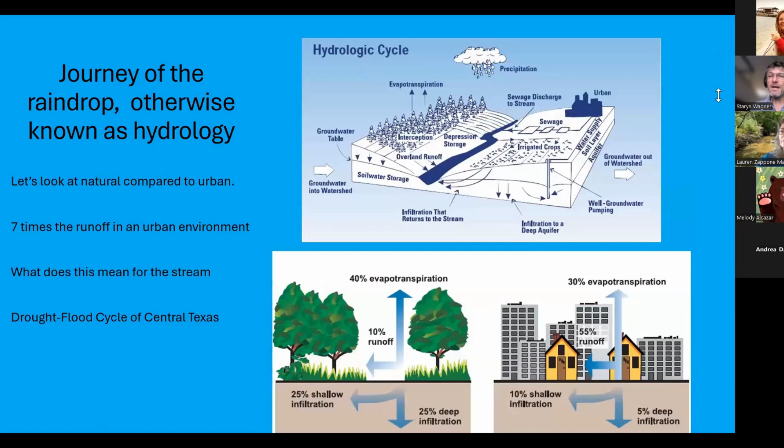As it would come down from the sky in a natural environment, and then hit trees and the leaves on the trees, which would slow down that raindrop. And then with less impact, it would hit the bushes underneath and the grasses underneath and slowly drip down and follow the root channels and the interstitial spaces in the soil and make its way down into the ground where some of it would evaporate back up into the atmosphere. There'd be plant uptake.

The water would also travel through the soil, finding its pathway to the streams. That's where our streams come from and why streams flow when it's not raining. But then we have a situation where we start building things out. And in this scenario here, I only show two examples: one of the fully native natural forest and a heavily urbanized area, right?

And you can see that there's some stuff here. You can see that we got a drastic change in the water balance, right? There was 40% evaporation before, 30% now. But the big difference is, if you look at what's going on the ground, there used to be 50% of the water going into the soil, both to deep infiltration and to the shallow infiltration. But in this urbanized setting, it's now down to 15.

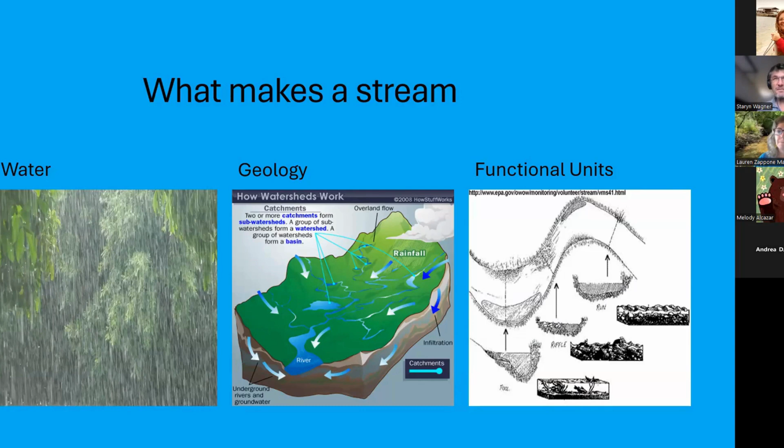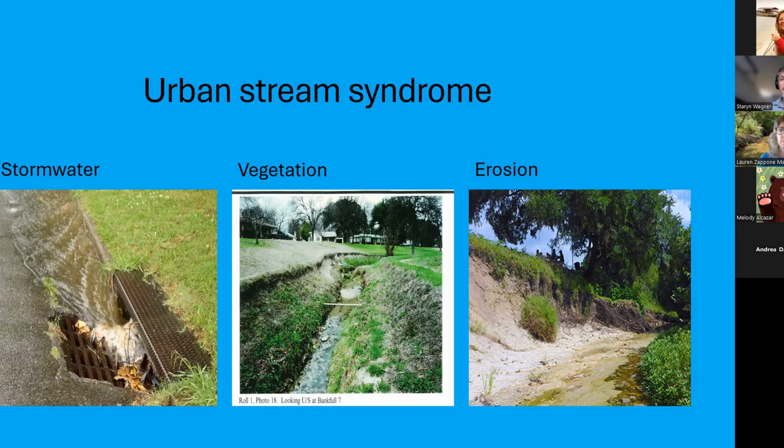But as we divert all this increased runoff in these suburban and urban environments to the stream, we get what's known as the urban stream syndrome. Our stormwater is going into these pipes, and these pipes are shooting it out like water cannons at our creeks. And our creeks are down cutting. So instead of a nice shallow scallop, which is the profile of the stream, we have these steep, deep channels that are down cut, usually to bedrock in this area. That's created a lot of erosion and causes a lot of other problems.

Our common system is the gray stormwater system. You can see that raindrop lands on the rooftop, runs down the roof into a gutter, goes down the downspout, which usually gets diverted to the driveway. It goes down the driveway into the street, down the street gutter into the storm inlet. Then all of these different sources collect in these storm sewers, and that outlet just blasts it out to the creek. That's been very effective at getting rid of our stormwater, and that was the focus.

But what we've realized is we're starting to really starve our soils of groundwater, and we've caused all these problems within our creeks. That raindrop originally could have taken days, weeks, months, years to travel from the sky to the creek. Now, with this gray stormwater system, that raindrop and all its buddies are delivered to the creek within an hour. So it is this massive inundation of water, and it causes a lot of flooding as well as erosion, and blasts out our aquatic habitat.

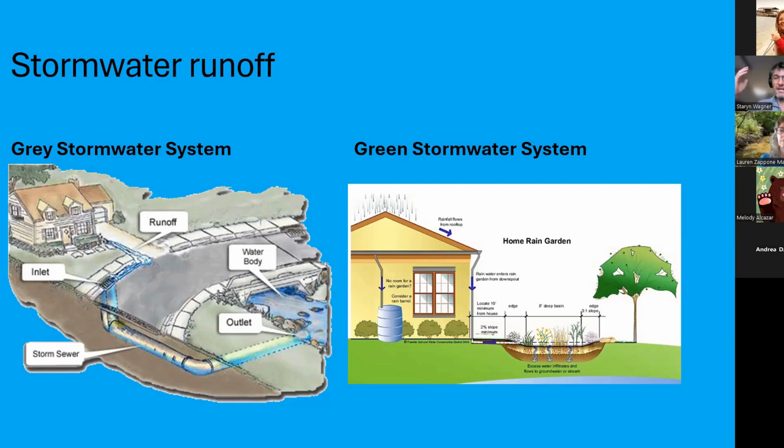So the green stormwater idea is to change that hydrologic process so that we intercept that raindrop once again, and this time try and slow it down on its journey to the creek and get it back to infiltration into the soil. So, what are some of the benefits? Why would we want to do this? Well, for one, whether it's running off your house, a street or parking lot, or even surface flow over your front yard or a park, there'll be a lot of pollutant treatment.

If we can get that water to stop and sink into the soil, then the biota within the soil has the opportunity to break down pollutants and control contaminants, and sometimes just hold the contaminants. Some things take so long to break down that we won't see that anytime soon, but we're keeping it out of our waterways. Also, with infiltration into the soil, we have the benefits of groundwater recharge, more water going to the streams during drier times, and keeping our plants alive, our grasses, our trees, our shrubs.

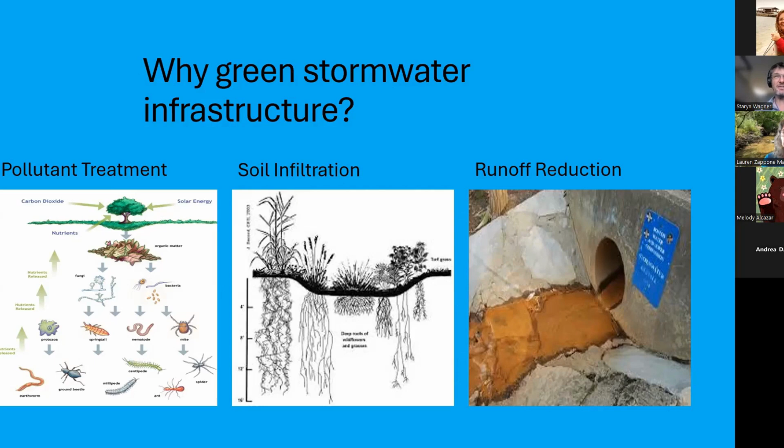And in this interception and infiltration, we get a runoff reduction. So that water cannon that I keep talking about blasting into the stream, there will still be some going to that, but we've reduced it.

And so the two types of green stormwater infrastructure methods that I'm going to talk about, one is the rain garden. We've talked about some of the function of it, right? There's several types. There's a variety of components to a rain garden. There's different vegetation, maintenance, design. So these are all some things that I'm going to cover.

Functions of the rain garden is capture and divert runoff, right? So normally, like I said, all of this water is most frequently diverted to the street. Our streets are made to collect rainwater. They have a high point in the center, and the outer edges by the curb are down low. So that's why it's called curb and gutter. Those are sort of the gutters of the street. The center is high so that even when there's a lot of water in the street, the emergency vehicles still have sort of a shallower or drier part in the center that they can move on.

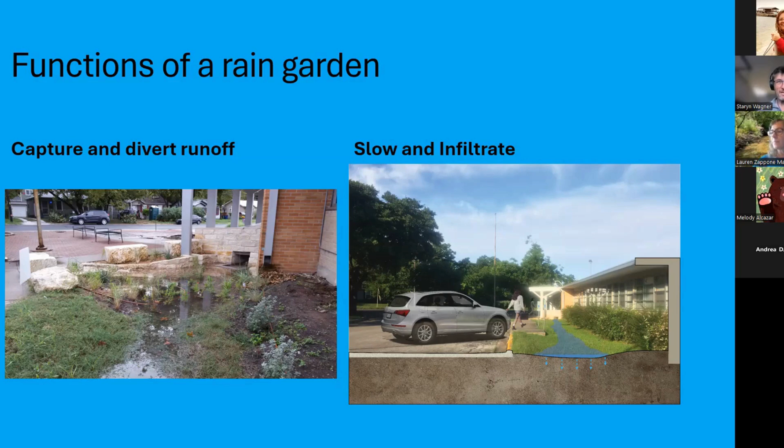And the other function is to slow this water down and infiltrate it. So if we can get water flowing through a vegetated area, even if that rain garden is full, the vegetation is going to slow down the movement of water. So we're at least giving it a little more time to soak into the ground, and we're not rushing it to the stream or to the storm drains as quickly.

So there's a couple types of rain gardens. And we could probably go into more detail of different types, but two key types that I like to point out are an inline rain garden and an offline rain garden. Now, the inline rain garden has an inlet for water and a separate outlet for water. And so as soon as the rain starts and runoff begins from your drainage area, the pond starts filling up because the water's flowing in from the inlet.

But once that pond fills up, then the water that's flowing in passes through the rain garden and it goes out of the outlet, right? So the pond is full, the water needs to keep going somewhere, and all this water passes straight through the rain garden, out the outlet, and onto whatever pathway we've chosen for it to go afterwards.

Now, an offline rain garden, which is the kind I tend to prefer, has only one inlet, no outlet. And so it's set up such that as the water is flowing off of your drainage area, it flows into the inlet. And then once the rain garden fills up, the water just naturally bypasses the inlet and carries on in the direction that it was going anyway.

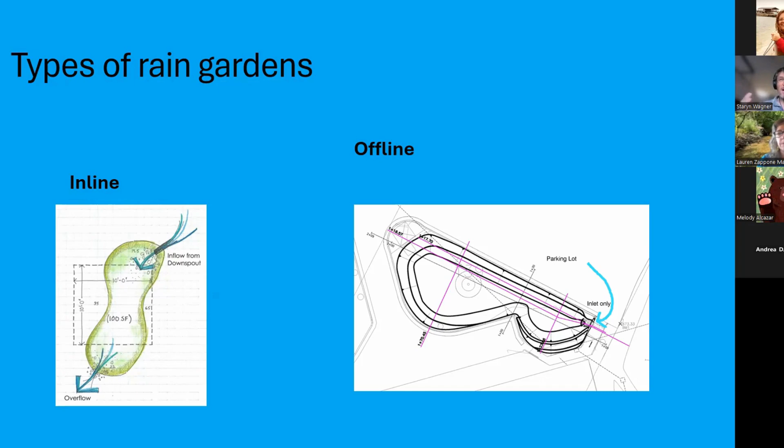With an inline rain garden, depending on how it's set up, but most frequently, the water coming in first fills it up once again with that first highly contaminated amount of water. And then the rest of the clean water kind of passes through, washing out that more polluted stuff. So it doesn't do as good a job at grabbing and holding onto those pollutants because some of them get washed out.

Components of a rain garden, we've kind of talked about this, inlet and outlet. So you have to set up somewhere for the water to come in, and you have to either set that inlet up so that once the rain garden is full, the water bypasses, or you have to set up also an outlet so that when the rain garden is full, the water flows out of it without eroding any of your berms or the outlet itself. So it's important to harden that.

And then berms. Berms are what create the sort of dams of your rain garden. And when you're excavating a rain garden, like digging the hole for it, it's nice to have thought this whole process out so that the soil you're digging up, you're using as your berm. And the berm itself also should be about 4 to 6 inches higher than your outlet. So you don't want it to be at the same level because it's hard to get everything perfectly even.

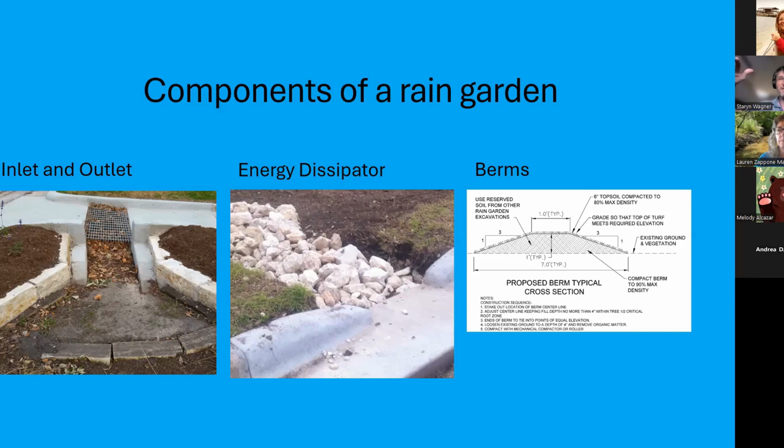And if the water finds its way over a berm, which is usually made of soil, the soil will erode a lot easier than a hardened outlet. So if you make your berms about 4 to 6 inches higher, the water will be flowing out of the outlet before it ever even considers trying to get over a berm.

Staryn, we have a question real quick. Yes. In the chat, it says, is there a cost difference as it relates to the design and maintenance with the inline and offline versions? Yes, I would say there is somewhat of one because you do have to construct a hardened outlet. And when I say hardened, I mean anywhere from like brick, flagstone rock to concrete, right?

So if you just have an offline one, you're only constructing one passage, and that also needs to be hardened for the water to flow in. But if you have the inline, you also then have to build one for the water to flow out of and not erode your rain garden.

Well, speaking of erosion, we have another question. Yes. How do you make sure that you're not undermining infrastructure with rain gardens or depressions? Is there a distance that is needed to be away from sidewalks, roads, or buildings? Yes, and I do mention that a little later, but good question. It's hard to say that there's a definitive distance.

Different buildings have different foundational situations, and it's always something that in the placement of your rain garden, you really need to look at and think about the fact that, okay, I'm going to be putting water into this soil. And so it'll be a lot wetter.

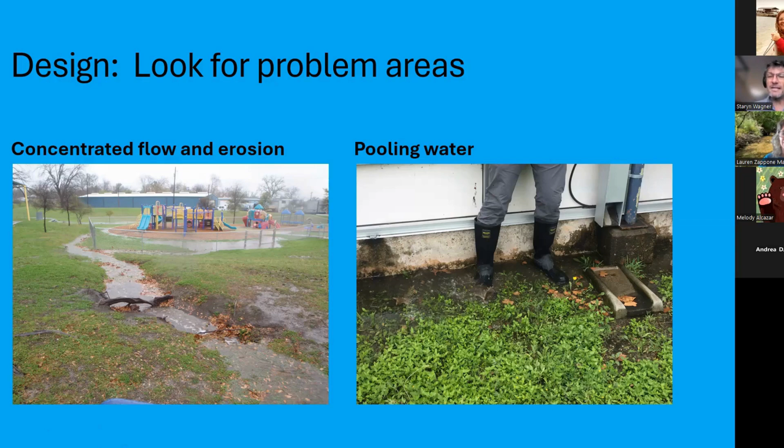Right, so location. In this particular case, we chose Reilly Elementary School because we wanted to get the community to do more green stormwater infrastructure. And Reilly Elementary School has a combined interlocal agreement with Austin Parks and Rec. And so when school's not in session, the school grounds are part of the park, and so the public has access to it. So if I did what I did at this location, they should be able to then go and take a look at it.

And so I had all of this area separated up into small drainage areas. Like I knew where the roof ran off to a gutter, and I had that drawn as a square. And so I was able to think of this whole area as unique drainage areas that I could then start to focus individual stormwater controls, green stormwater controls for each of those, and I would know how to size them.

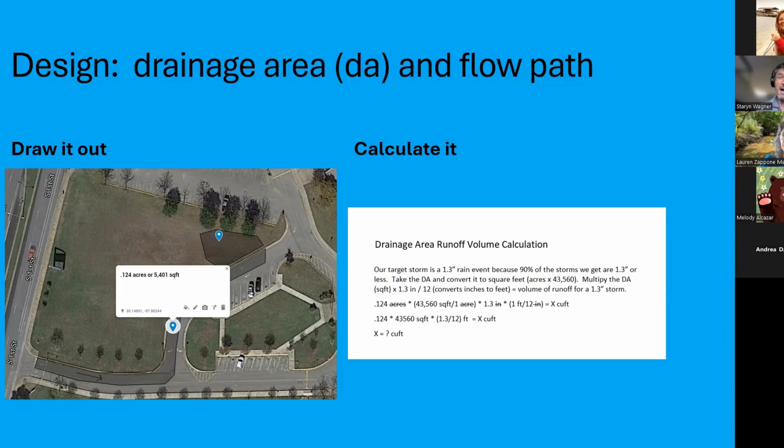And so anyway, you do some calculations, and I included a PDF of this presentation in the chat, so you don't have to try and remember all of this as I'm spewing it out, but you can just reopen that and look at how I did things. But so you can do some calculations to figure out how much is going to run off of your drainage area. And then you're going to use that, in combination with the infiltration rate, to determine how big your rain garden needs to be.

So when you do a rain garden, it's not exactly a one depth fits all. It's not absolutely necessary, but it's important, to help guarantee the success of your rain garden, to understand what infiltration rate that specific soil has.

And a simple way to do that is you just dig a little 12-inch hole, fill it up with water, let it soak in. And if it just soaks in real quick during a really dry time, fill it up a few times until it starts soaking in slower. Once it's slowed down, you fill it up, and every 15 minutes, you mark the time and the depth of the water, right? And then you take the last few of those because you're looking for a constant infiltration rate.

And you just average them out so that you come up with an inches per hour rate, and that is your infiltration rate, right? And then that gets used in our next step, where we know the infiltration rate. So with the drainage area and the infiltration rate, we're going to determine how deep our rain garden can be. And that's essentially, the area of the rain garden times the depth equals the volume.

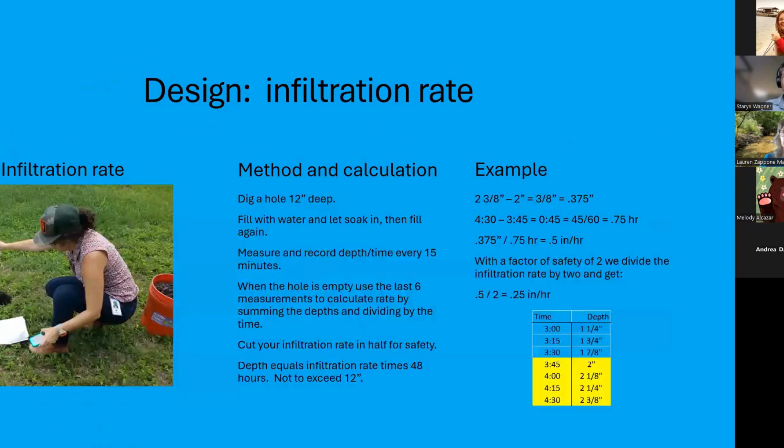So the volume of my drainage area is 585 cubic feet, from the area I had drawn in this previous picture here, which was 5,401 square feet. And I multiplied that times the 1.3 inches of rain, and I converted the inches into feet because I have to do square feet times another foot measurement to get cubic feet. So I do 1.3 divided by 12. That gives me feet of rain. And then multiplied that out.

And then the depth is going to be that rate, which is our 0.25 inches per hour times 48 hours. And we do 48 hours. Oh, that's the other thing, right? You want a little bit of a factor of safety on this. That infiltration hole you dug, it is a horseshoes and hand grenades type thing, right? It's close to it. It's not going to be the exact infiltration rate.

And what we don't want to do is create a rain garden that just ends up being a pond and holds water for more than 48 hours, right? Because then we have the potential of it breeding mosquitoes. So we take our infiltration rate that we calculated and then we cut it in half. So whereas our calculation showed it drained half an inch per hour, let's cut that in half and just say it's 0.25 inches per hour.

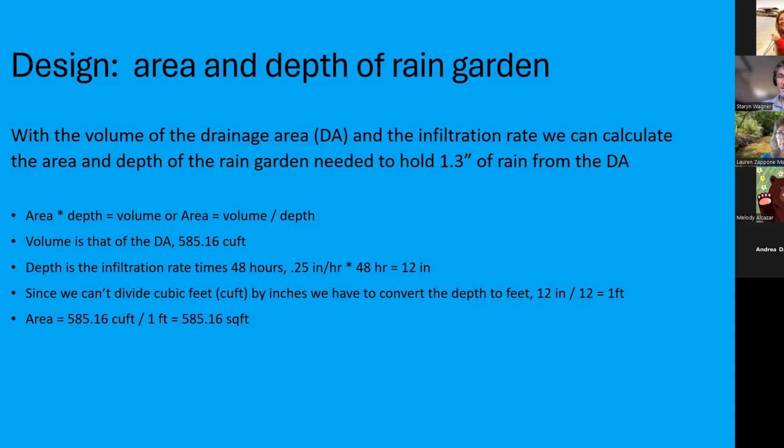Anyway, that's how you figure out depth of your rain garden, is your infiltration rate times 48 hours. And never do you want to go deeper than 12 inches, or at least that's the city's policy. We don't go deeper than 12 inches for safety reasons, and that's just sort of a safety element we've built into all our rain gardens so that we don't get ourselves into a bigger problem, especially when we start to have rain gardens all over the place.

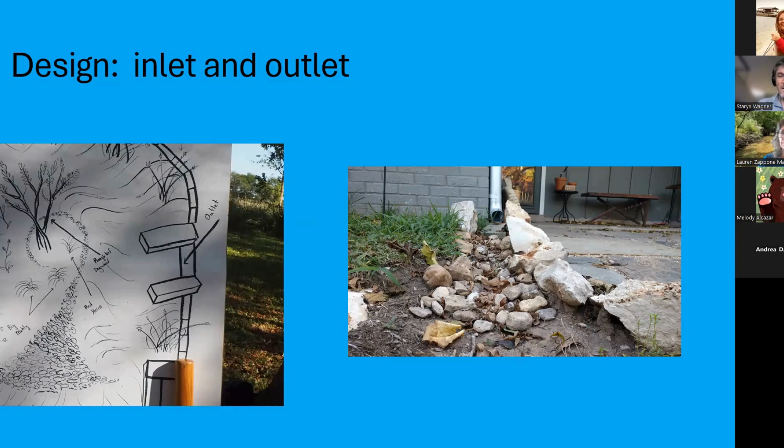Another example, I'm going to go back a couple pictures here, is in this fully vegetated one. You can see there I've got concrete and I have a metal grate that the water flowing down drops into that grate and then flows into the rain garden. Another example of an inlet.

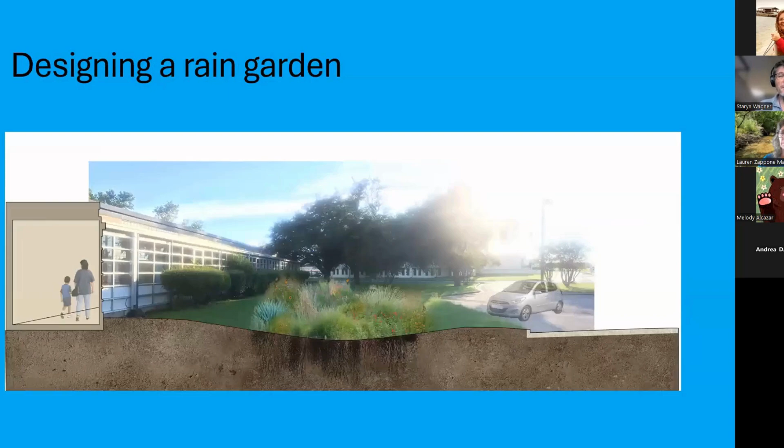Okay, so now your vegetation decisions, we discussed that a little bit, right? You can go fully wild and woolly all the way to just plain grass. And those are decisions that you need to make. It's about what you want. We tend to think that larger vegetation helps improve the infiltration rate. At the moment, I'm working on a study of that over 12 biofiltration ponds here in town. Unfortunately, that study is going to take me about another 3 years to complete, so I don't really have any answers for you on it now.

But the idea is taller vegetation has deeper roots, and those roots create channels for the water to flow down into the soil. Whereas mowed grass, sod tends to have shorter roots and doesn't help the water infiltrate quite as easily, but it still allows water to infiltrate. And you can divert your water into a vegetable garden or a landscaping garden, right?

Constructing a rain garden. Here's an example of just a group of volunteers putting in a rain garden to capture a splash pad runoff over by Mueller Airport. I can't think of the name of the park at the moment. So it can be as simple as this or as complex as getting a contract and having contractors build it with machinery.

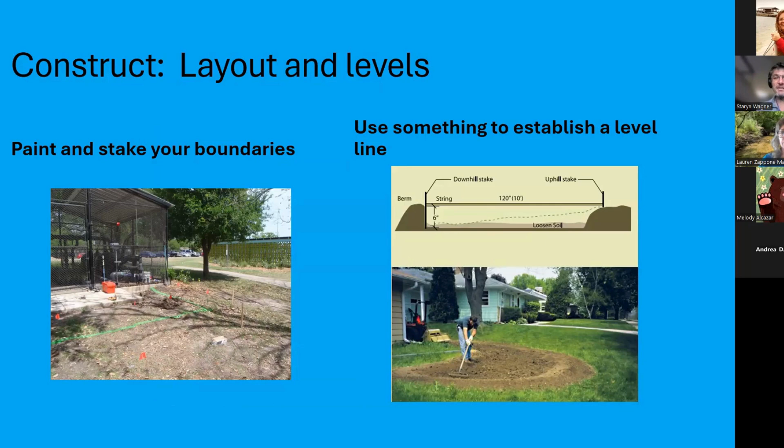You want to lay out where you're going to dig with string and lines, and you need something to understand what's level so that you can measure off that and make all of your depths correct. Dig your hole, use that soil to build your berms. Another thing is, as you're digging, there's a chance you're going to end up with extra soil. It's good to have figured out where you're going to put that before you start digging. That way you can just wheelbarrow it over to maybe some depressions in a sports field that needed leveled out, or somewhere that there's been a lot of erosion that you want to build back up.

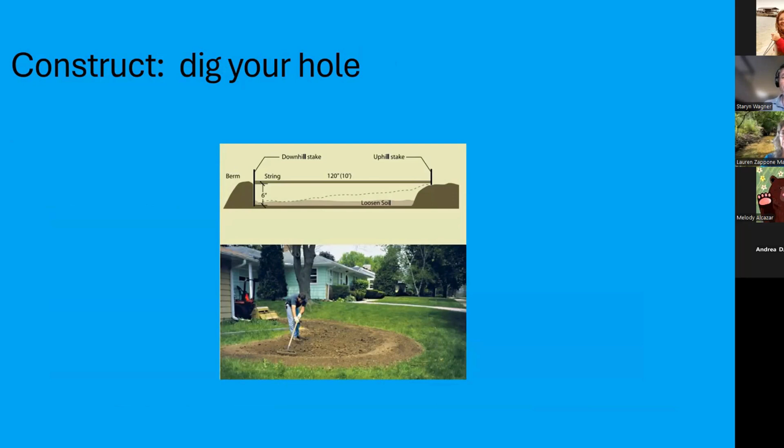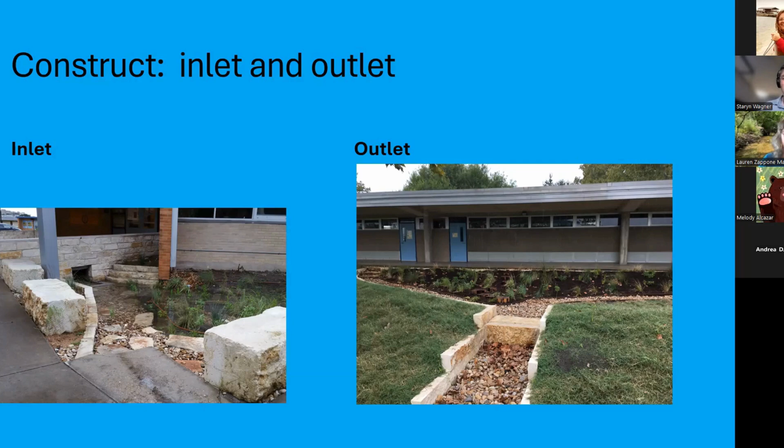And then once you've finished doing all your earthwork, the thing you want is soft soil there. Especially if you've had big, heavy mechanical equipment doing all the earthwork, but even if you had volunteers, there's going to be a lot of compaction of the soil as you're rolling wheelbarrows in and out and people stomping on it. So it's good to come back in and fluff that soil back up before you put your plants in.

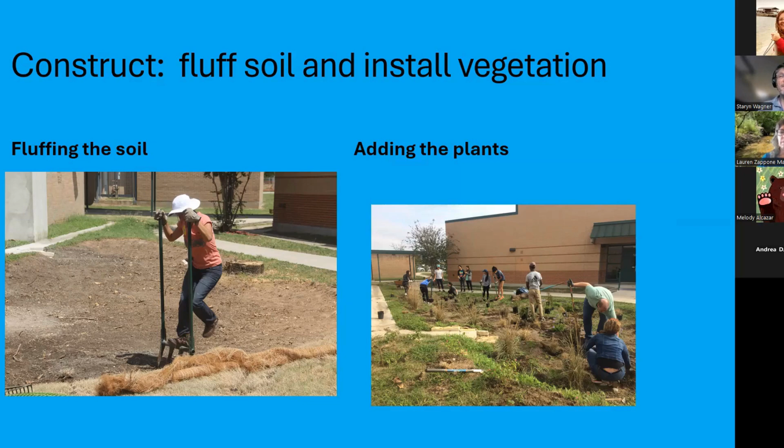And really, I'm not talking about turning the soil. I'm just talking about getting a spade shovel, or you can see in this picture, Yaz has this four-tined fork that you jump on, drive that into the ground, and then hang onto those two poles as you lean back, and it just cracks the earth open and will then allow a lot more water to infiltrate in, and it helps quite a bit. And then you put your plants in, right? It's usually the funnest part. But also you've got to keep them alive and help them get established while you're waiting on rain to come.

Okay, Staryn, I'm just going to give a quick time check. We've got about 20 minutes left, and Lauren's still got to do hers too. Yes. Excellent. Okay. I will take 2 minutes to bust through this. I'm not going to go into the detail on the cisterns. I just want to touch base on it. Sorry, I talk a lot.

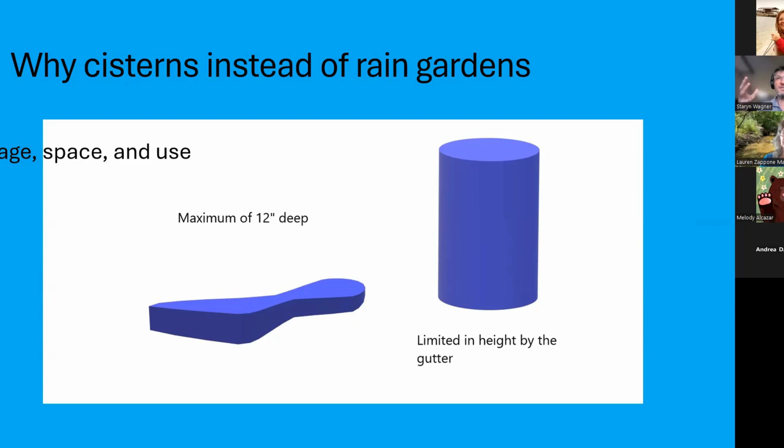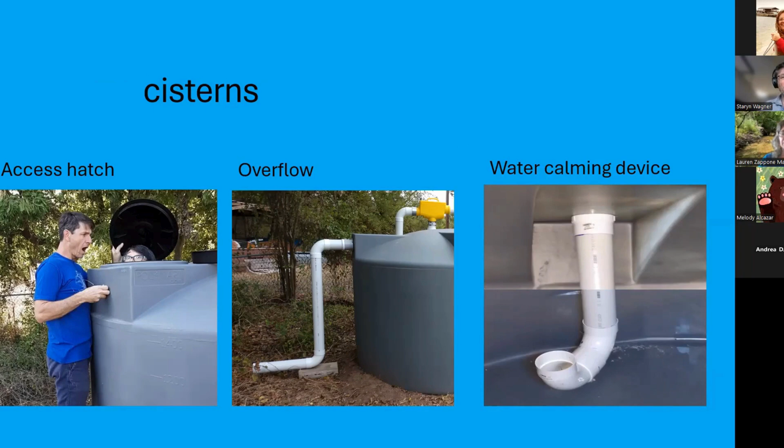And you've got the PDF of this, so you can look through it, but cisterns have been around for a long time. You can use them either for stormwater mitigation or for water conservation. A reason that you would do a cistern instead of a rain garden is space and need for water, right? You can capture a lot more water in a smaller footprint with a cistern than with a rain garden. And there are several types of systems you can have. You can have a passive cistern where it captures the water and then just slowly drips it out, or you can have a pressurized system where your cistern captures the water and then goes through a pump and pumps it out with more force.

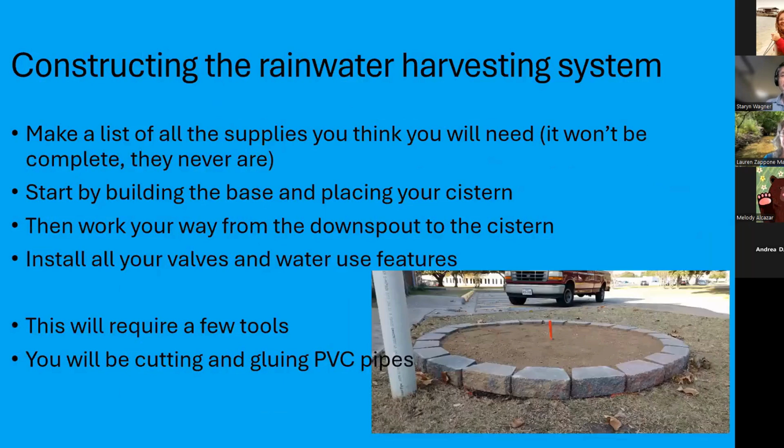Let me just touch real quick on maintenance. Anything you build that you want to continue to function the way you intended requires maintenance, and it will require maintenance forever. So it's important to try and build something so it needs the least maintenance possible, but it will always need maintenance.

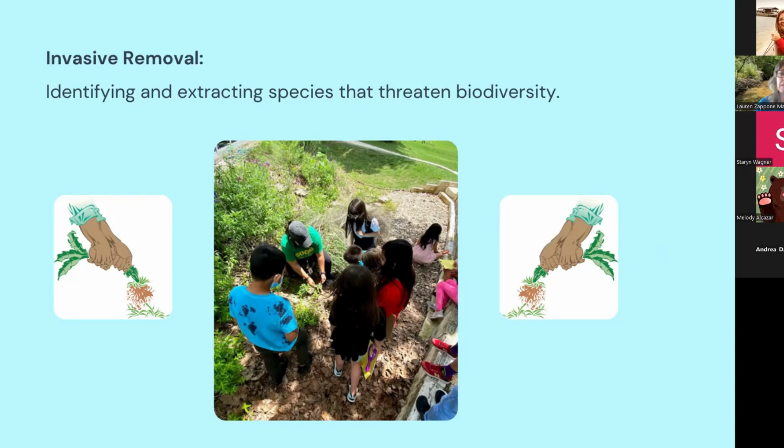Later on, as the rain gardens got more established, we would help the students learn about which species were invasive or just not desirable in the area. One thing we find on a lot of our school campuses is that the squirrels really love to replant pecan trees everywhere. And some of these spaces in our rain gardens were not ideal for that. So we help students identify the invasive species and talk to them about what it means to be invasive. Sometimes it's just they're in the wrong place for the purpose we want. Other times they can actually threaten a plant community. And so we really want to teach them about biodiversity and what those threats to biodiversity could be.

And then over time, and especially in the beginning, there were opportunities for us to do some more replanting with the kids when things in certain areas weren't taking off, maybe because they didn't get enough water, or in the space that he showed that was primarily a sod area, we realized there was also a really great opportunity to seed that area with native wildflowers. And so over the years, we've had the kids seed and reseed different areas that will help increase the biodiversity of their campus. And seeding is always a fun activity with the kids. We get to talk about everything from native plants to the life cycles of the plants to the life cycles of the species that use those plants as hosts.

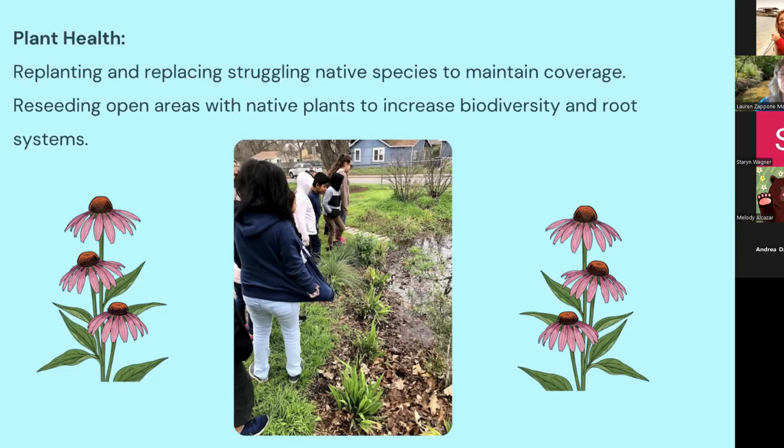And so each of these activities is a really major opportunity for our kids to engage and understand more about what these cool spaces that are very unique to their campuses are providing for the greater community.

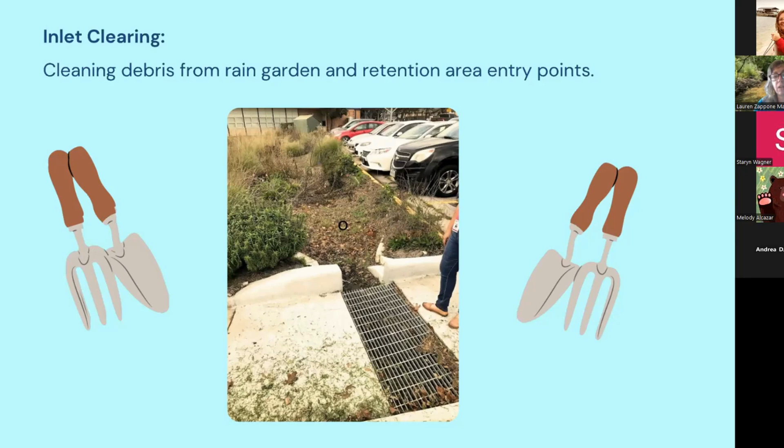Another activity that is fun for our students is cleaning the debris from the rain garden and retention area entry points, to teach them more about that flow across the land when we're talking about our watershed and the flow of the water drop. Then they can see how sometimes those drops will get stuck in areas. We don't want them in the parking lot because we'd rather have them in the soil where they can infiltrate and stay in the land. And so by walking students through these processes of cleaning both the entry points and exit points of the rain garden, they can get a better idea of how the water is flowing across their school campus.

And then another fun thing is looking at the water quality. Reilly Elementary abuts Waller Creek, which is the creek behind me in this picture in my background here. And in the beginning, before the school district fenced in all the schools, we were able to at least once a year, sometimes twice a year, take the classes down to the creek to collect their own water samples. And then they would study and see the macroinvertebrates in the water. They could determine, based on which macroinvertebrates were present or not present, what the quality of the water was. And that was always fun for students. There's still an access point, but it has become more overgrown because there has not been as much passage back to the creek.

But over the past few years, we have been collecting the water samples ourselves and bringing them to the students so they can still experience the activity. It's just a little more challenging to get back into the space.

And then the other piece of this is learning from the systems and the operations of the system. So talking to the students about, again, how that water droplet is flowing and what's preventing it from getting to where it needs to be. We share with the students that some of the cisterns are intentionally leaky. And so when they fill up, they slowly over the next 48 hours drain into the ground. And that's where we want the water, in the ground.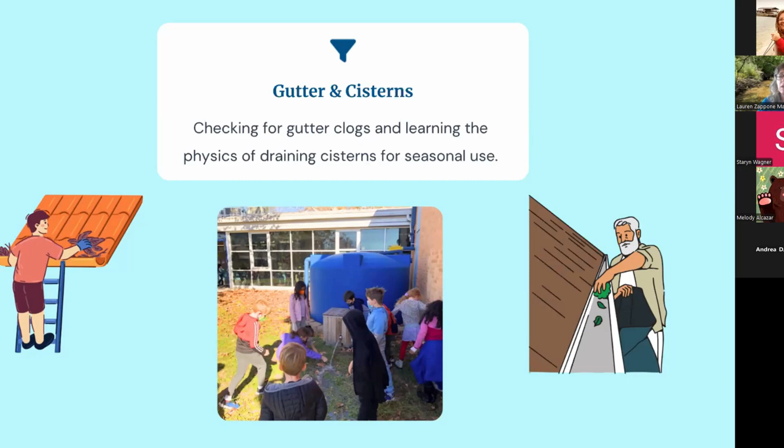A big one for these gutters and the cisterns, or the connection between the gutter and the cistern, is that they'll get clogged with leaves. So helping the students realize if they see a gutter overflowing and it's not going to the downspout, there might be a leaf clog, they can report it to their teachers, who can report it to us, and then we help them report those issues to the front office in the district.

Another activity that we do with the kids, or did a lot more in the beginning, now that the gardens are pretty well established, there's not nearly as much work. But in the beginning, the berms, as Staryn mentioned, sometimes they erode. Some of it was from the rain itself, and some of it was from students just being in the area and walking through the areas.

But over time, when we'd have our service project days, we'd have the students help to rebuild the berms and help us understand where there are areas that may need to be reinforced. Anytime the kids get to get in the dirt and build with it, they really appreciate it. So that's an activity that they have really enjoyed. And now that the rain gardens are much more established, it's a less frequent part of our service projects.

And another big activity that we like to do with students is conducting what we consider a waste audit, to look where there's litter on the campus and understand how it's getting there. Some of it, of course, is not water related, but where we know the debris is moving, we definitely use that as an opportunity to talk to the students about where it's going to go from the campus. It's not just going to stay there. It's going to end up somewhere. Where does it end up?